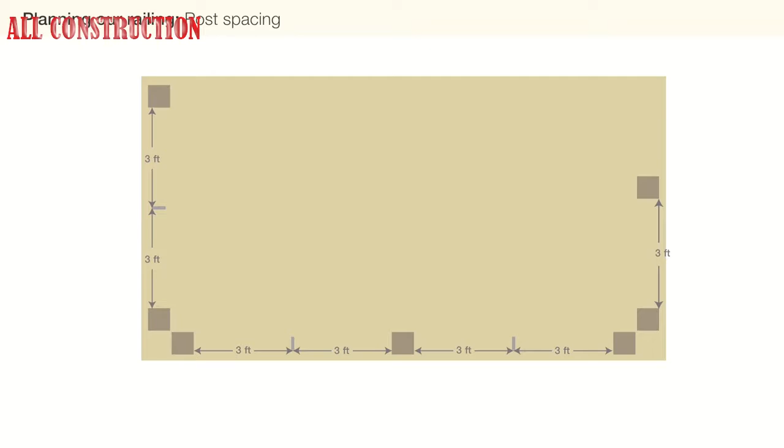member. If your railing terminates at a wall, be sure your termination post is no more than 4 inches from the wall. You will need at least 3 inches to allow access to the back of the post.

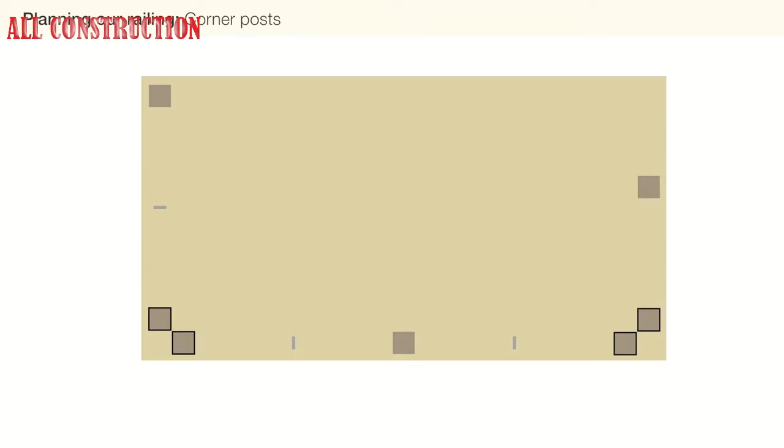We are using the recommended double posts at each corner to allow the cable to run continuously through the corners without terminating. We have 1 continuous run of cable with 2 corner bends. There should be no more than 2 corner bends in any run of cable.

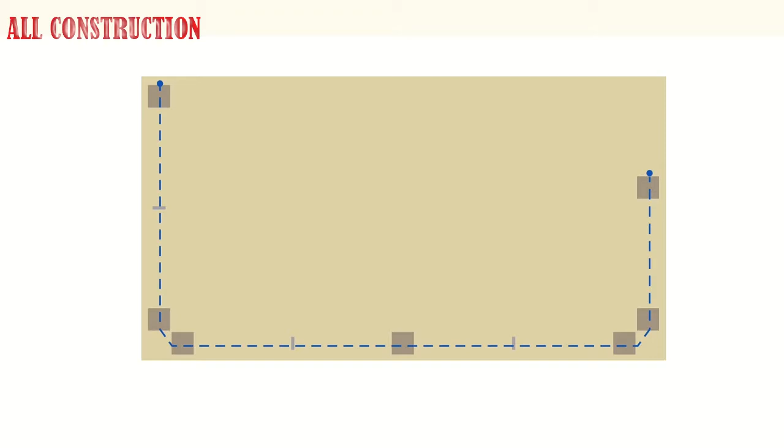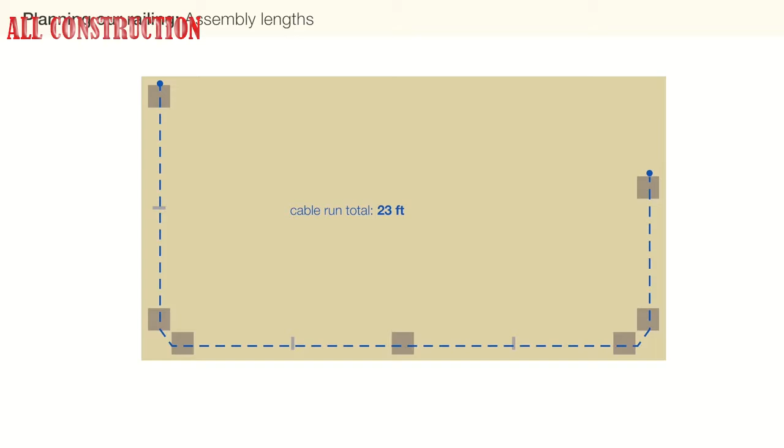We estimate the length of the cable assembly we need by measuring from the outside of each termination post. Cable runs with 1 or 2 corner bends should be no more than 40 feet long. Our cable run is 23 feet. We will be using 25-foot standard assemblies and trimming the excess cable.

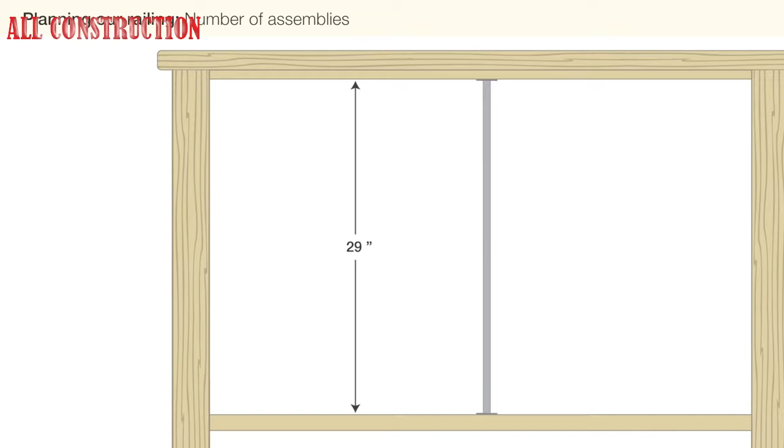To calculate the number of assemblies required, we need to find the height of the railing frame opening. Measure the distance between the top and bottom rails. The height of our railing opening is 29 inches. We recommend spacing the cables no more than 3 inches apart. We will need a total of 9 cable rail assemblies.

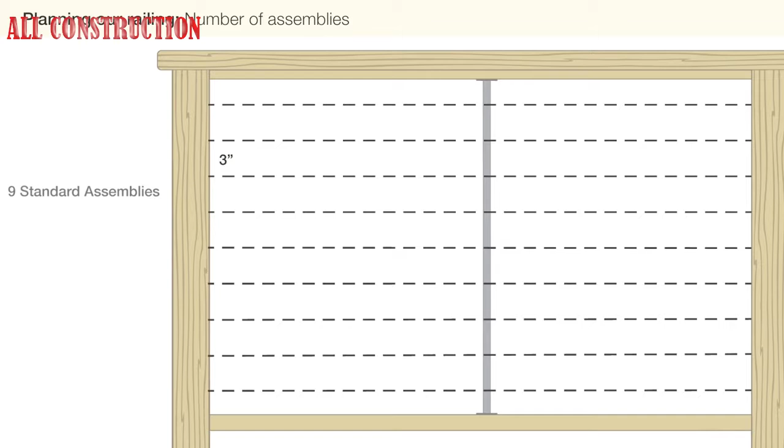For details on all railing frame options, please visit our website. Be sure to consult local building codes for any special requirements for cable infill in your area.

In this video, we will be using cable rail 1/8-inch standard assemblies available at many local building suppliers. 1/8-inch standard assemblies are perfect for all residential and light commercial projects. These prefabricated assemblies are sold in 5-foot increments at lengths from 5 feet to 70 feet.

Each assembly has a threaded terminal end which has been permanently attached to the cable with a special hydraulic press. The assembly kit includes a snug grip washer nut and flat washers, as well as a quick connect fitting for the other end of the cable.

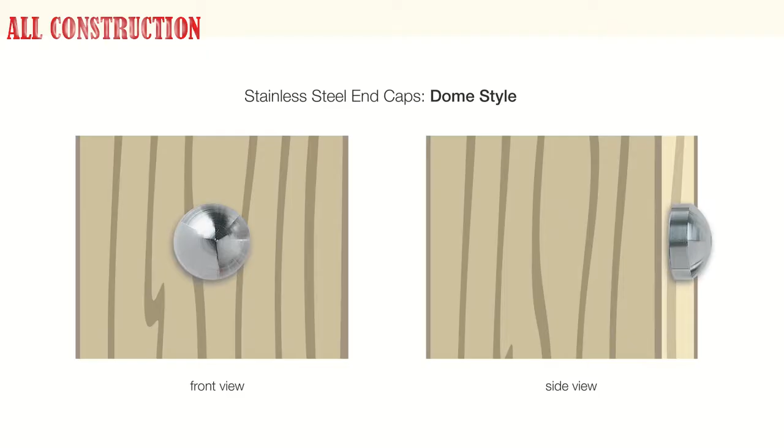In this video, we are using dome-style stainless steel end caps to cover, protect, and provide a finished look to the assemblies. End caps are available in other styles and are sold separately. We will also need protector sleeves for the 4 corner posts. Make sure you have all your cable rail assemblies and components before you begin installation.

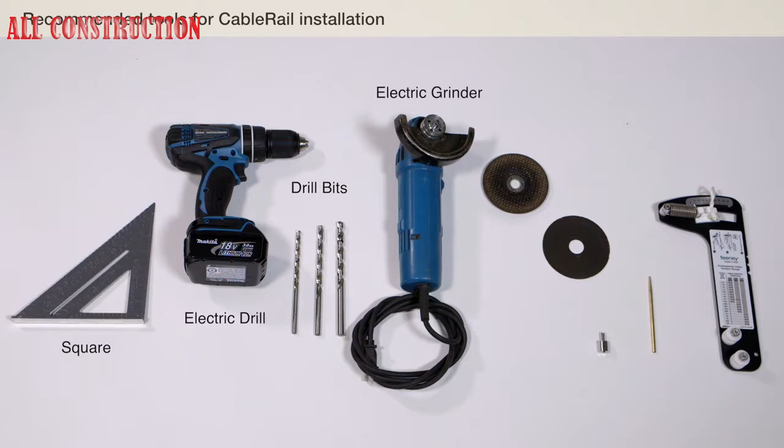You will also need the following tools: tape measure, safety glasses, work gloves, pencil, hammer, cable rail cable cutters, 7/16" wrench, crescent wrench, vice grip pliers, square, electric drill, drill bits, electric grinder with cutoff disc and grinding disc, cable release tool, Feeney cable lacing needle, Feeney tension gauge.

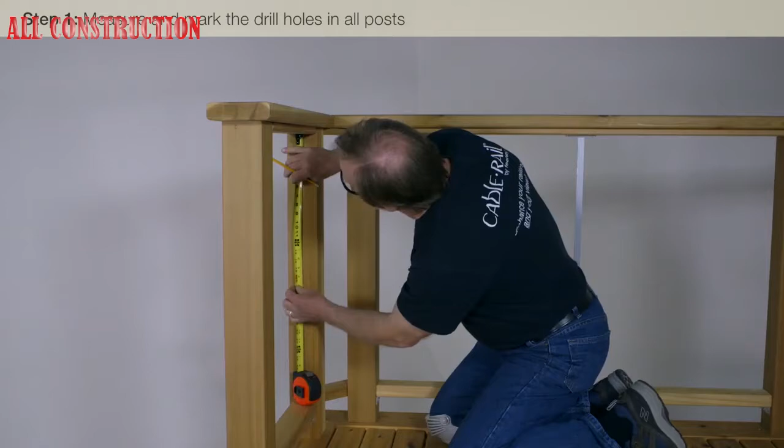Using our cable spacing measurements, we will now mark drill holes in all posts. Drill bit sizes vary based on the diameter of cable and the type of fittings you are using. In our installation, we're using 1/8-inch cable with standard quick connect and threaded terminal fittings. We'll need 3 different drill bit sizes.

A 1/4-inch drill bit will be used on intermediate posts and pickets and to pre-drill holes in the quick connect post. A 5/16" drill bit will be used on the threaded terminal post. A 3/8" drill bit will be used on the quick connect post. Here are the locations for the quick connect post, intermediate posts, and threaded terminal post.

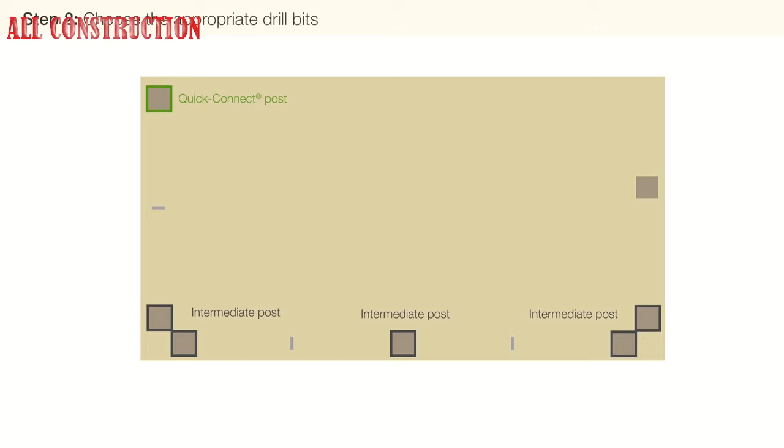Start by drilling the threaded terminal post with the 5/16" drill bit. Continue around the deck, drilling holes in all intermediate posts with the 1/4-inch drill bit.

At the quick connect post, first we through drill the post from the inside with the 1/4-inch drill bit. Then we counterbore with a 3/8" drill bit to the depth of the fitting.

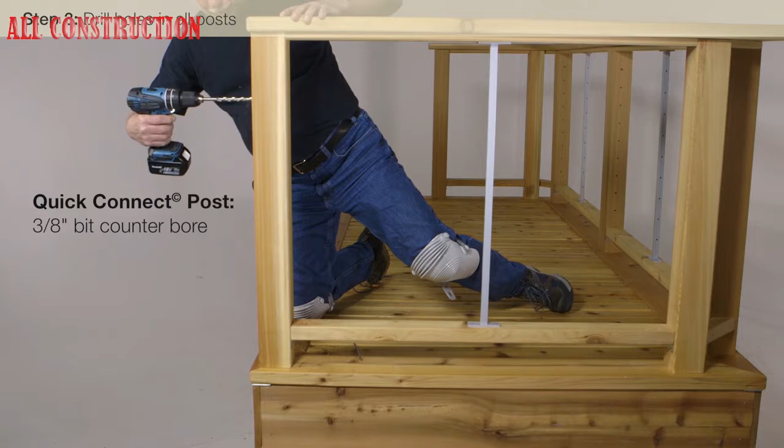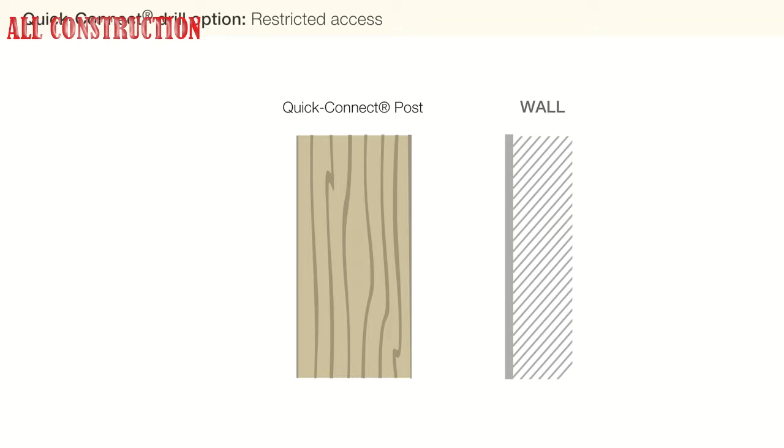You can mark the length of the quick connect fitting on the bit before drilling the counterbore holes. If you do not have enough access to the back of the quick connect post, you can simply through drill with a 3/8" drill bit.

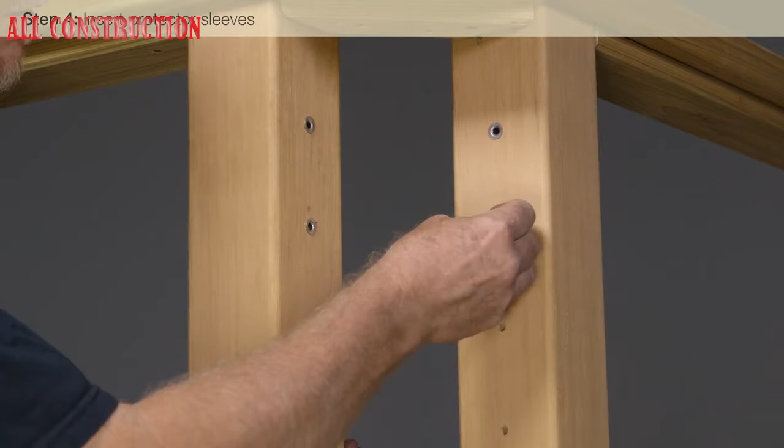We are using protector sleeves in the corner posts where the cables will angle out of the post holes. We insert the sleeves into the 1/4" drill holes and gently tap in until flush. The tight friction fit securely holds the protector sleeve and prevents abrasion on the wood surface once the cable is tensioned. We are now ready to install the cables.

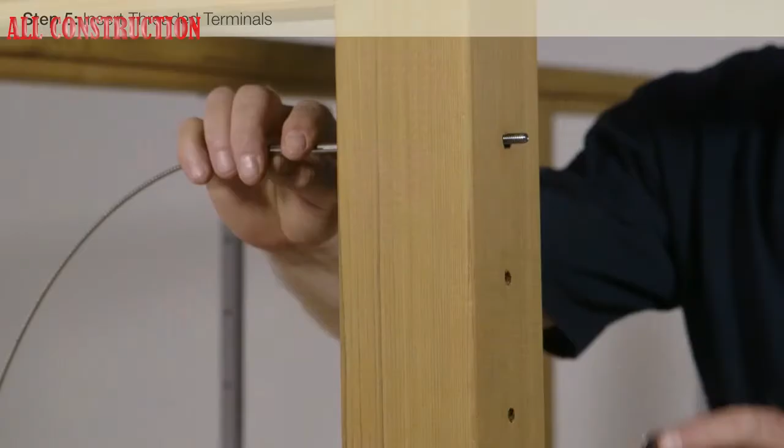Insert the threaded terminal into the post and secure it with a flat washer and a snug grip washer nut. Tighten the nut 2 to 3 full turns or until you feel resistance from the snug grip threads. Now we're going to lace the cable through the other posts.

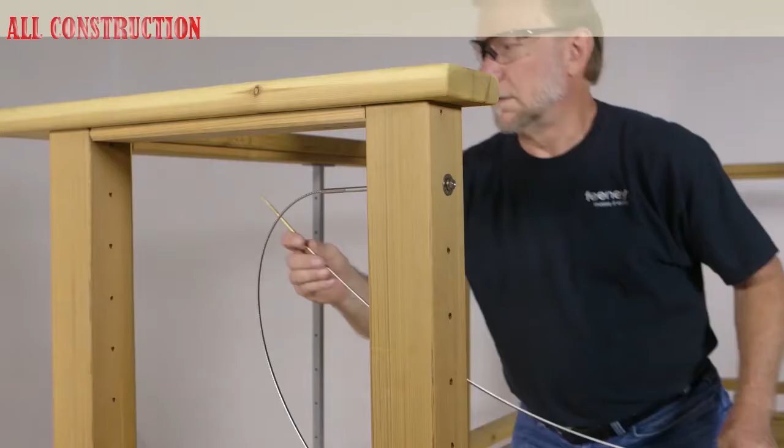We recommend using the Feeney cable lacing needle for smoother threading through post holes. The lacing needle prevents the cable strands from snagging on the sides of the post holes. We lace the cable through the corner posts and all other intermediate posts and pickets, continuing around the deck.

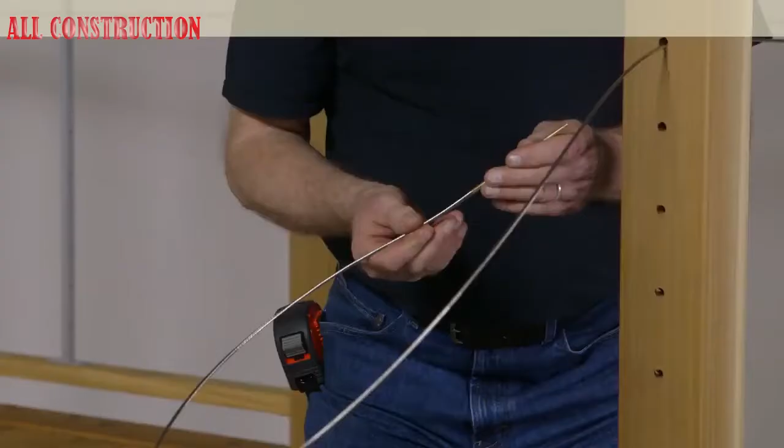Finally, we lace the cable through the quick connect termination post and remove the lacing needle. Cleanly trim the end of the cable. Slide a flat washer and the quick connect fitting onto the end of the cable and slide the fitting into the post. The special spring-loaded quick connect jaws only allow the fitting to slide in one direction and will automatically grip when the direction is reversed.

If you make a mistake, don't panic. You can use our quick connect release tool. First, loosen the cable by removing the washer nut on the threaded terminal fitting. Then, at the quick connect post, use the release tool to disengage and remove or readjust the position of the quick connect fitting. Lace the other cables through the posts until all assemblies have been installed.

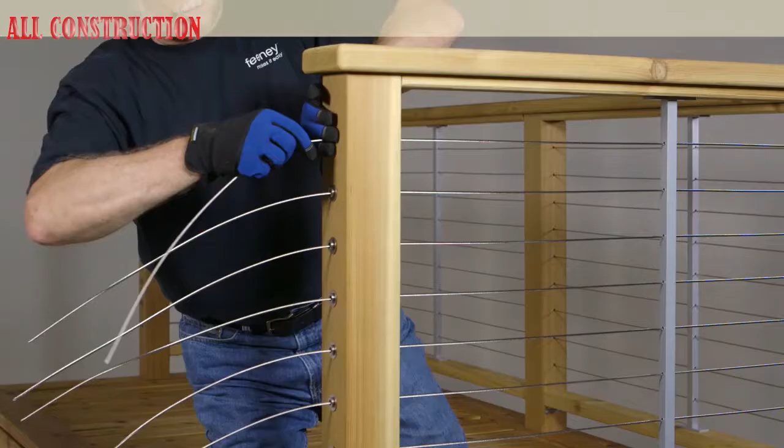After all cables have been laced, we take most of the slack out of the lines. Hold the quick connect fitting with one hand and pull the cable tight with the other. The jaws will automatically lock when you release the cable. When tensioning on longer runs of cable, you can use a pair of vice grip pliers and a block of wood for leverage to help pull more cable through the quick connect fitting.

We are now ready to begin final tensioning of the cables. Return to the threaded terminal post and grip the hexagonal shaft of the fitting with a pair of vice grip pliers to keep it from spinning. Tighten the snug grip washer nut with a 7/16" wrench to adjust the final tension in the cable. The special snug grip threads prevent the nut from loosening.

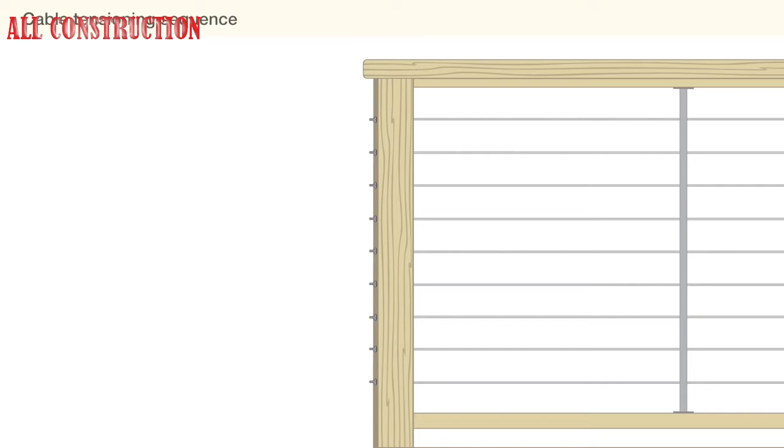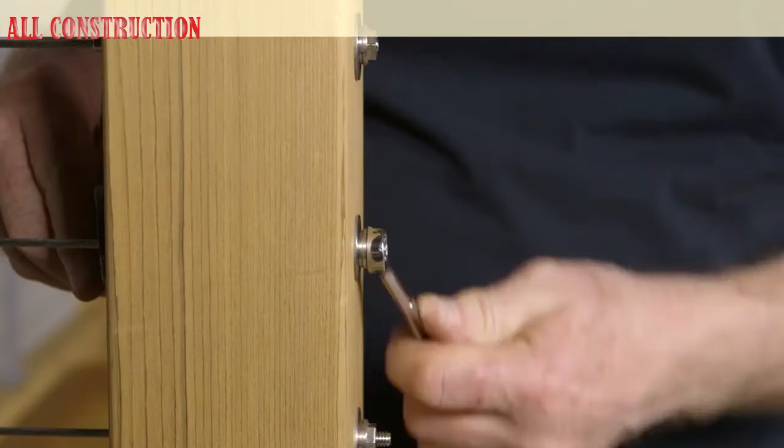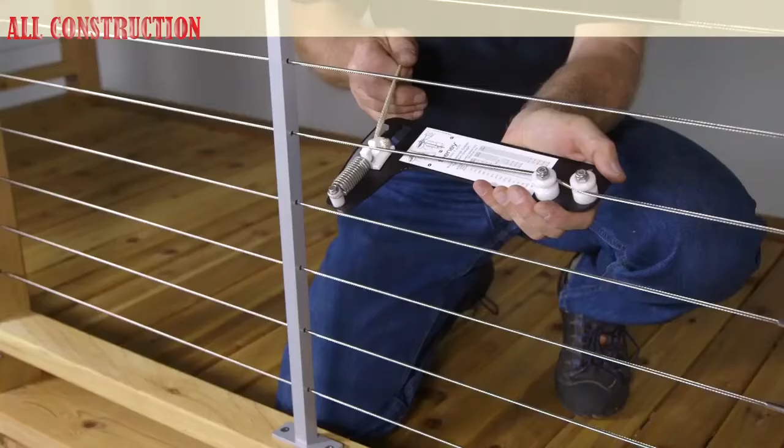Be sure to follow the recommended cable tensioning sequence to help minimize stress on the railing frame and easily adjust uniform tension across all of the cables. Start at the center cable and alternate until all cables are tightened. We do not recommend using electric or pneumatic tools to tighten the snug grip washer nuts. If the nuts spin too quickly, there is a risk that the threads will heat up and seize. You may use a Feeney tension gauge to determine when you have tightened the cables enough.

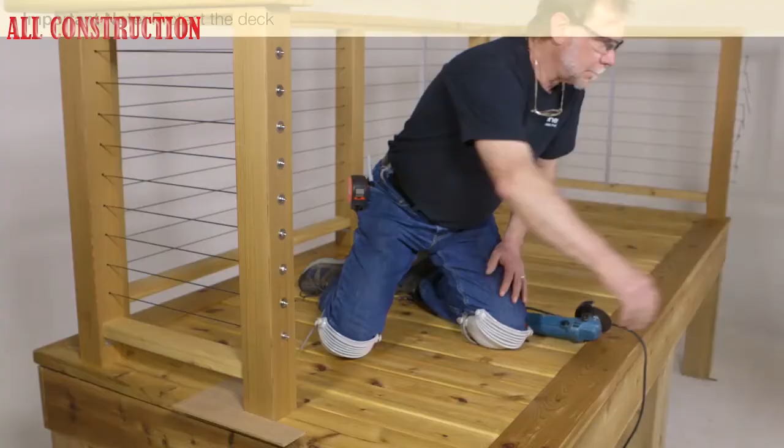Trim the excess thread as close to the snug grip washer nut as possible. We are using an electric grinder with a cutoff disc, but you may use a hacksaw or electric reciprocating saw with a metal cutting blade instead. When using an electric grinder, be sure to protect the deck and surrounding surfaces from sparks or hot metal pieces that may fall.

At the quick connect end, we're using the electric grinder again to remove excess cable that will impair the attachment of the stainless steel end cap. Get as close to the quick connect fitting as possible. We finished the assemblies with the dome-style stainless steel end caps. Snap them on over the exposed quick connect fittings and the snug grip washer nuts. Our railing is complete.